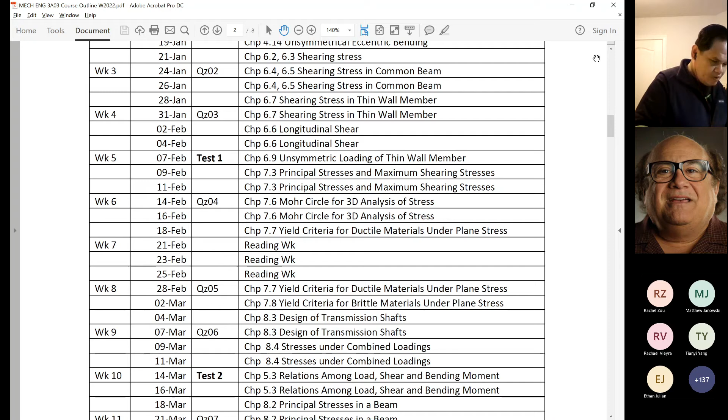Let me explain to you what is the difference with this course. Okay, so in 2P04, when Dr. Koshi was teaching you guys, there is a lot of remembering of concepts. There is a lot on understanding of the concept. So I think you guys were taught bending moments, 3D stress analysis, and so on and so forth.

It's just remembering and understanding, and remembering, I think there's quite a bit of procedure. Okay, this is for 2P04, and you have maybe just a bit of analysis. So if I look at 2P, a lot of times you will spend about 40% of the time remembering, 40% on understanding, 20% on analysis. Okay, so this is the overall structure in terms of learning.

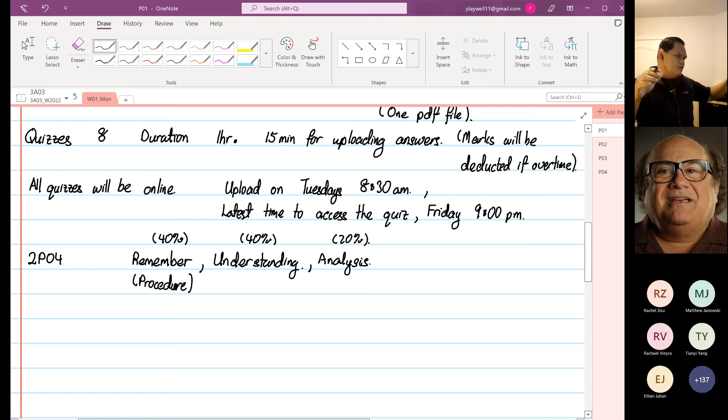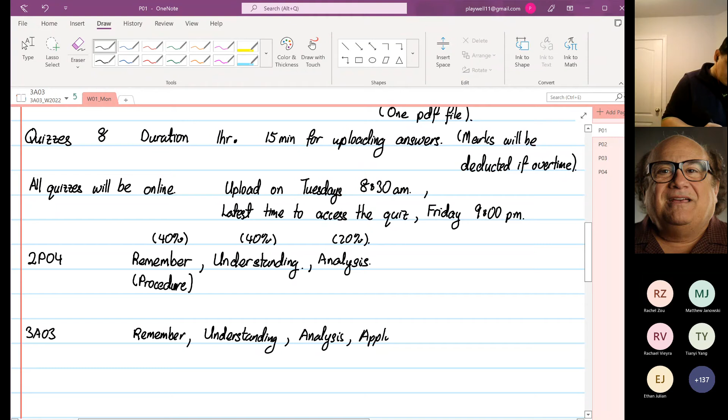Okay, 3A03, you still have components of remember, understanding, analysis, apply, and critique. So I test you on more components, okay?

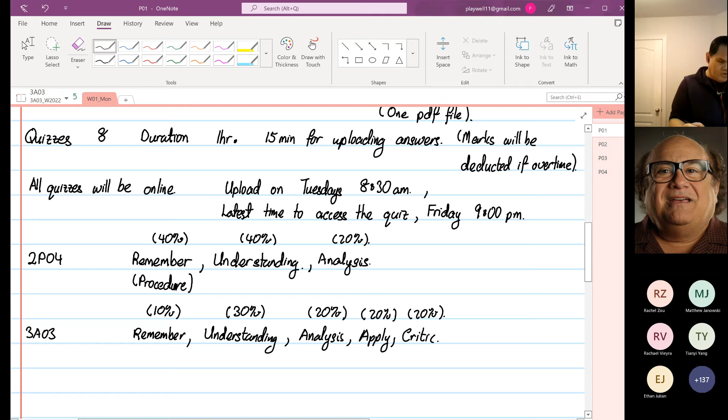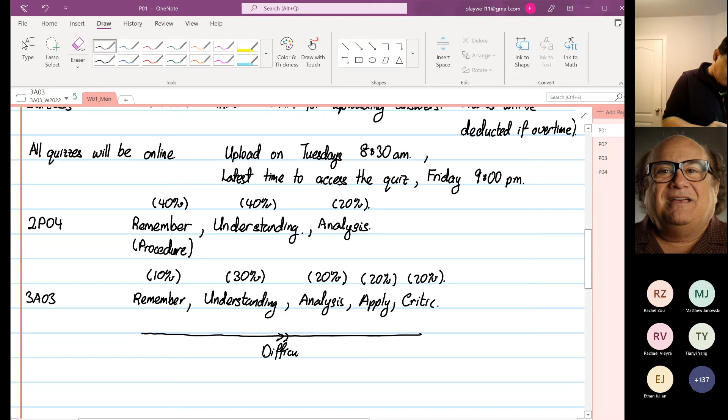Okay, the further you go up the line, it's going to be more difficult. It's well known, so the difficulty goes up when we go further in terms of learning. Remembering and understanding, analysis, apply, and critique are all a learning process, so it's going to get more difficult.

Okay, so that's why the class average is low. But listen, I'm not really bothered with your class average. More important, I want you to learn, and I'm going to do something different this term. I will only disclose after your first term test. Okay, I can tell you now, but if I tell you now, everyone will take it easy. Let's not be short for class. Okay, any other questions?

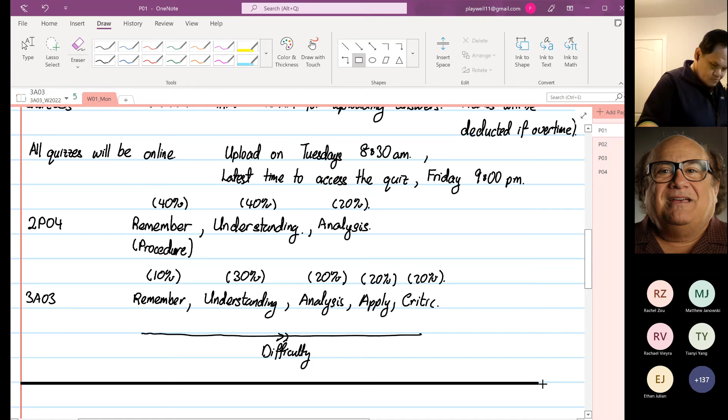Okay, I will start the class. I will do our introduction. You guys don't hear the squeaky pen anymore.

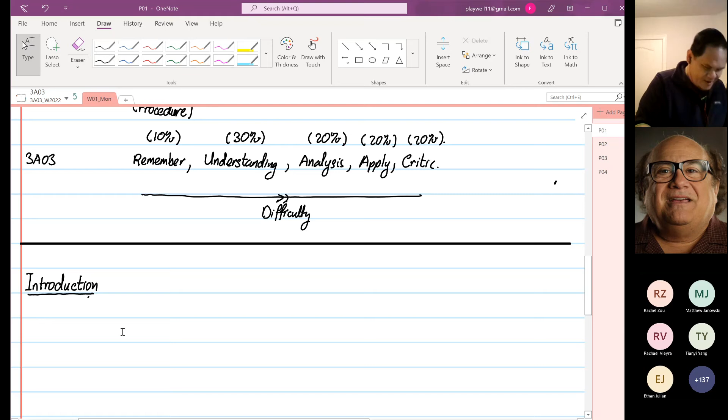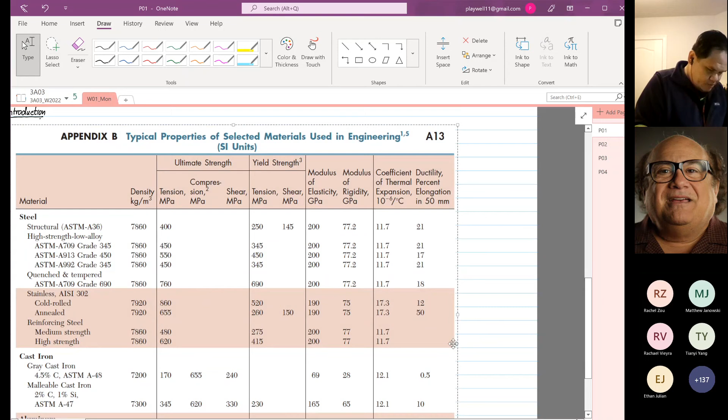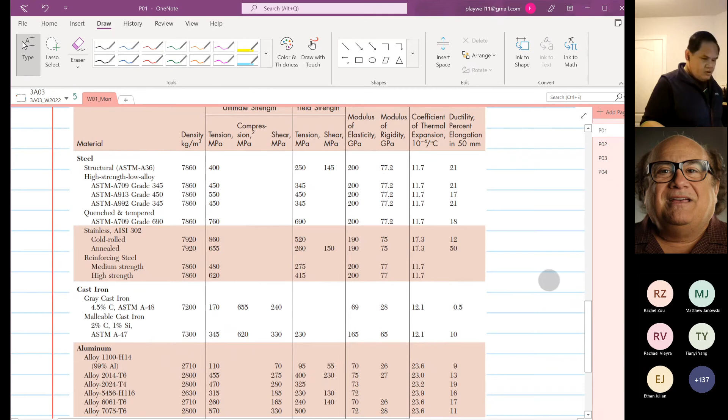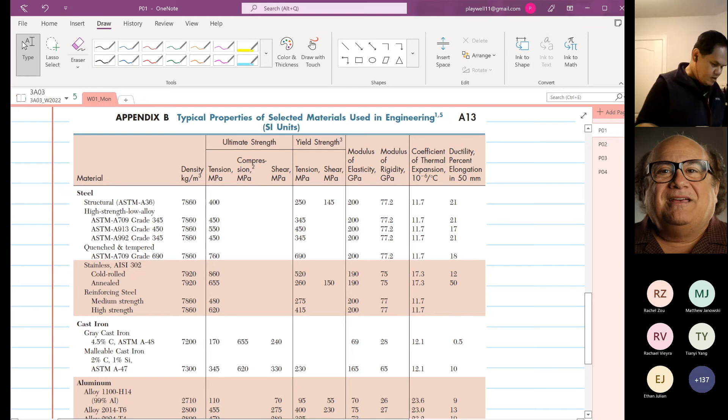Okay, so I posted these notes, or not these notes, this table, on Avenue to Learn. So a lot of times you all can see the table now, right? Okay, what we see down here is a material property table. So you have steel on the first column, which is the material type: steel, cast iron, aluminum, and so on and so forth. It's in your textbook, given density.

Then the first column is ultimate strength. If you look at the ultimate strength, it's divided into tensile, compression, and shear. Okay, so that's ultimate strength. The yield, again, you have in tension, and then you have in shear. Then you have modulus of elasticity, and then you have modulus of rigidity. Okay, and then you have coefficient of thermal expansion and ductility.

Now, can someone tell me why do they give ultimate strength and yield strength? Can someone tell me why? Anyone?

Anyone? Why do they give both, and which one would you use? Anyone? I hear no answer. Everyone is still shy.

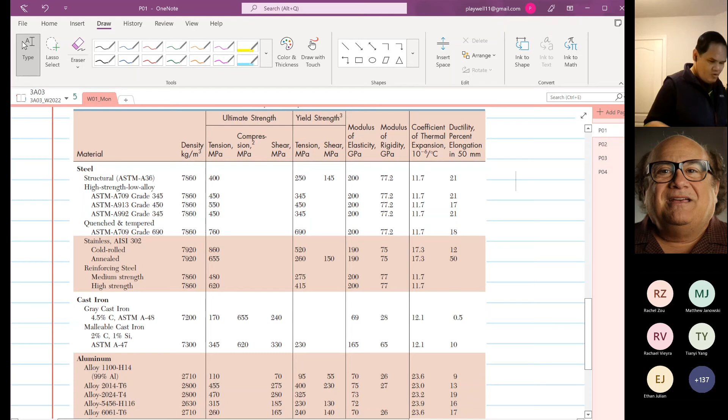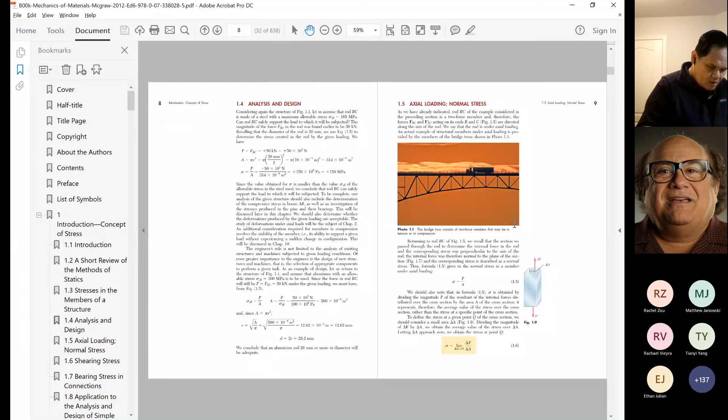Good morning. Okay, before I go any further, I will show you a table, if I may. And this is the textbook that we'll be using, and we are going to look at this formula over here on chapter number 1, and probably you guys have seen it before. Okay, this one over here.

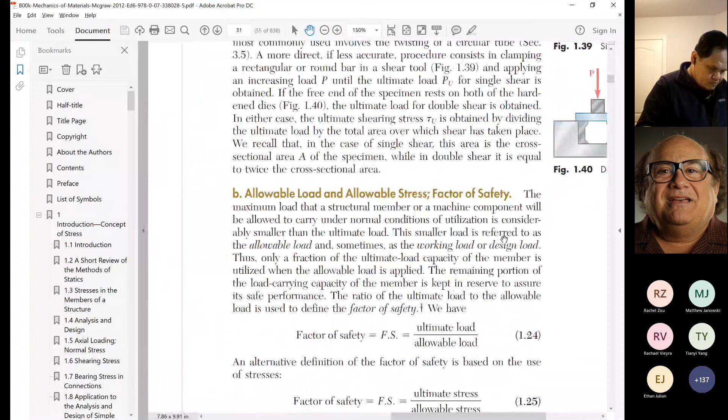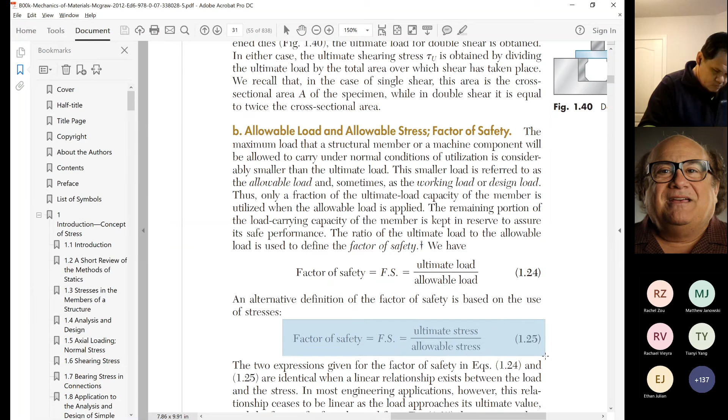Yeah, and I'm going to copy. Okay, and I'm going to... okay, all of a sudden my OneNote gone missing. Unbelievable. No, it's there, okay. And I'm going to paste over here.

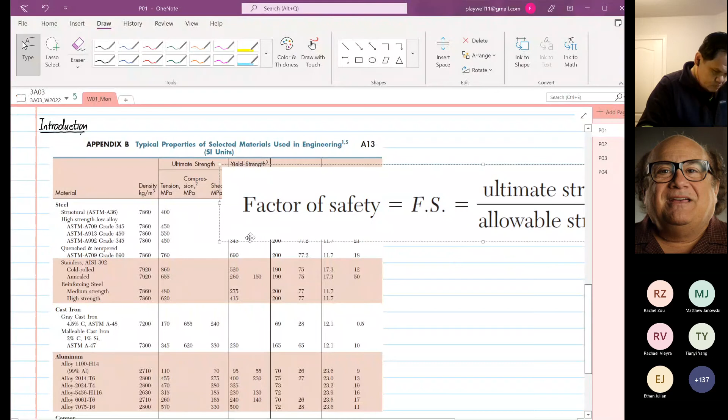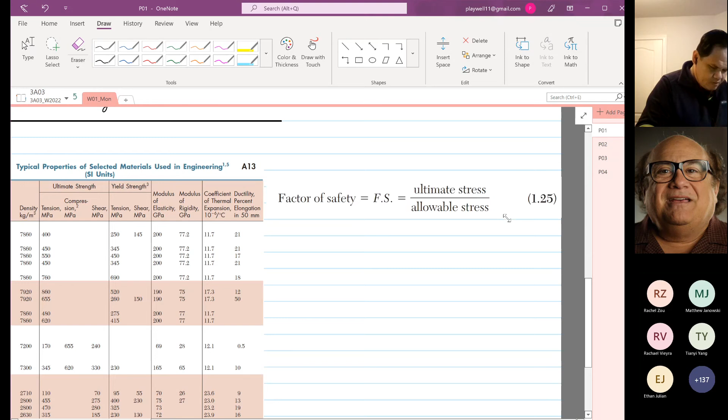So what you can see over here is we have a formula that states that the factor of safety is equal to what? The ultimate stress divided by the allowable stress. Okay, to determine if the structure is safe, okay?

The caffeine hasn't kicked in yet. Good morning, mine's whiskey, okay? I need it. Eric, since you are there, I would like to talk to you after class. I need your feedback regarding an issue.

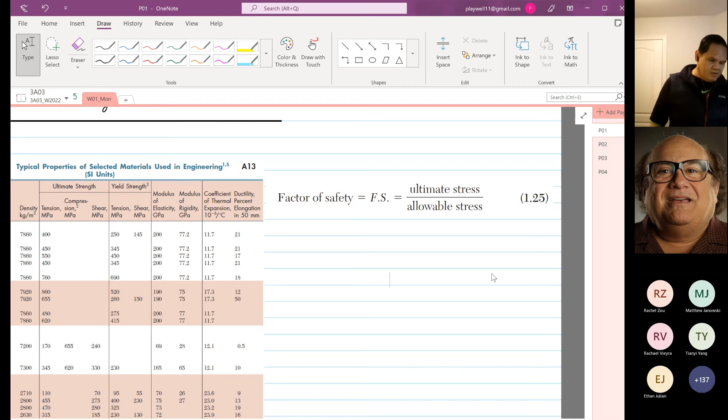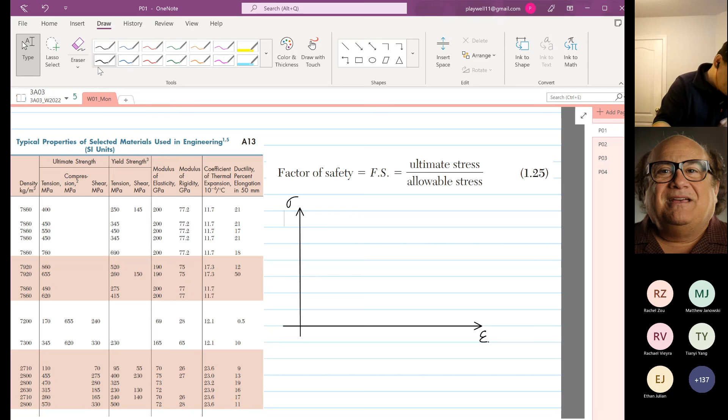So if I were to recall you on drawing the infamous stress strain curve, you guys say, oh shit, here we go again. Okay, if we look at our stress strain curve. Okay, so this is strain. Okay, so over here,

This is stress. Okay, so initially you're going to see a linear relationship, right? And then you will see from here, you have this. Okay, so over here, this is your ultimate strength. Then over here at this point, that is our yield strength. Okay, and as what I said, as you have seen this diagram countless times in 3CO3, if we were to draw a line down here, okay, on the right hand side is the plastic region. This is where we have the Johnson-Cook equation, okay, and then on the left hand side is the elastic region.

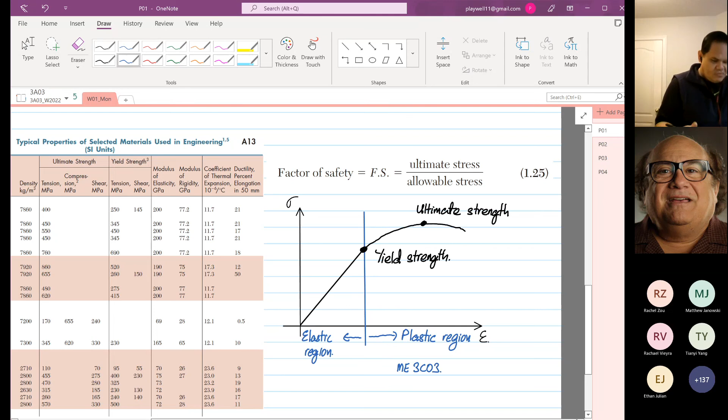Okay, so on the right hand side, you apply for ME 3C03. Okay, on the right hand side, because when you do manufacturing, you want your material to be in the plastic region. Okay, you want your material to be in the elastic region. Okay, on the left hand side is where you have topics like 2PO4 and 3AO3. Okay, you want to design something that operates in the elastic region and not in the plastic region.

Okay, so now going back to the formula at the top. Okay, now we look at the formula at the top. Okay, the formula at the top says factor of safety is equal to ultimate stress divided by allowable stress. Can someone give me an opinion regarding this matter, please? What do you think? Is the formula right or is the formula wrong? And if it's right, tell me why. If it's wrong, tell me why. Anyone, please.

You cannot just take it for a fact that this is from the textbook, we are good to go. I'm not saying that the textbook is wrong, okay? But can anyone make a comment, please? Anyone?

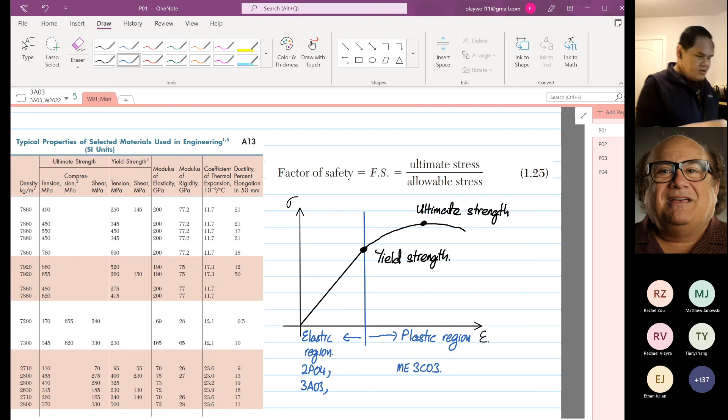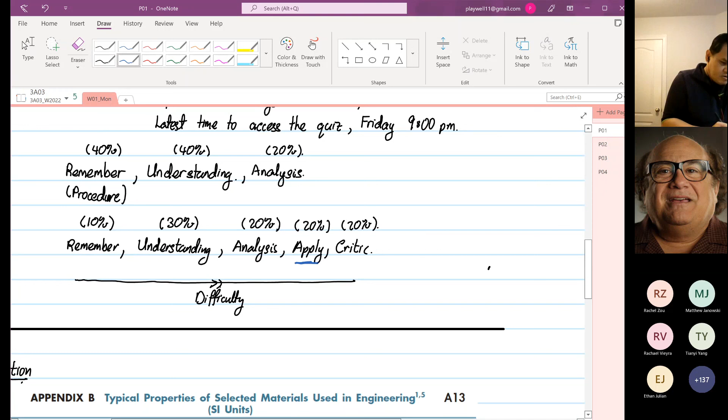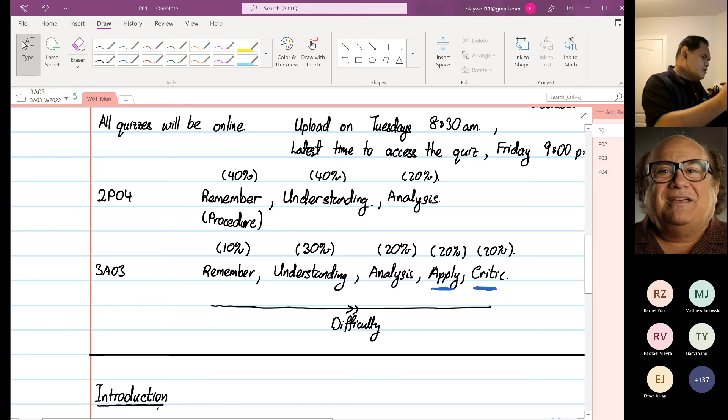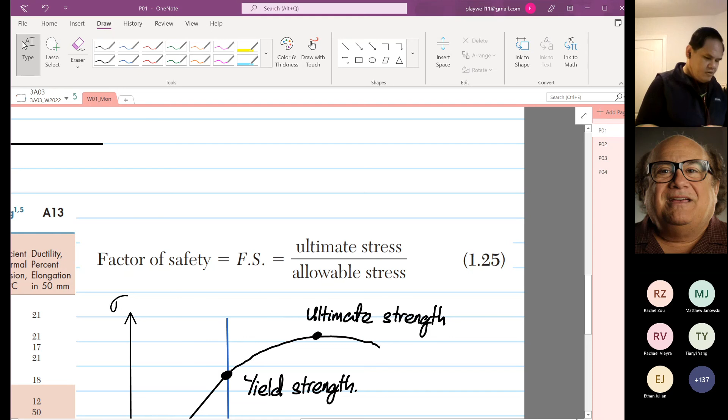So this is where I bring us back into here. This is where we go deeper into application and to be critical about our application. Okay, in 2PO4, they just give you a set of formula. Okay, this is the textbook, go. Okay, factor of safety is equal to ultimate strength divided by allowable stress. Okay, let me tell you what is correct now. Okay, or let me tell you what's going on now. Okay, so let's go into we apply now.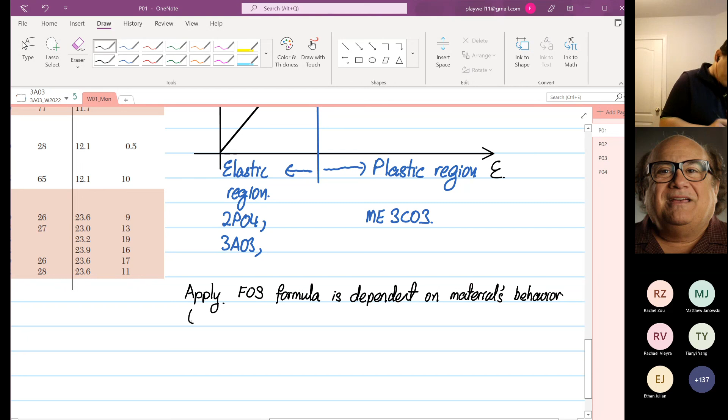Okay, let's look into apply. Okay, let's look at apply. Okay, so the factor of safety formula is dependent on material behavior. Behavior over here is dependent on whether they are classified as brittle...